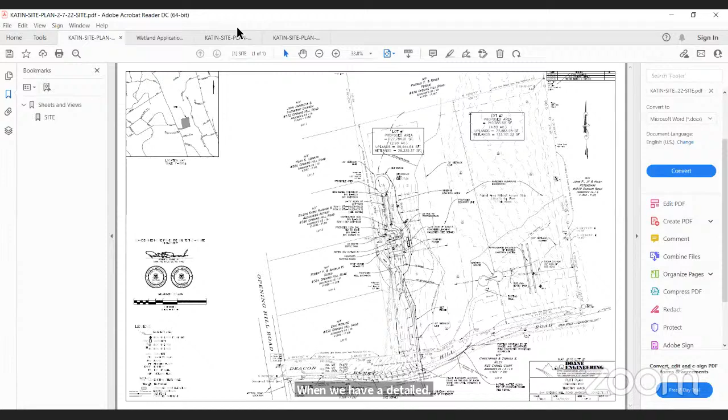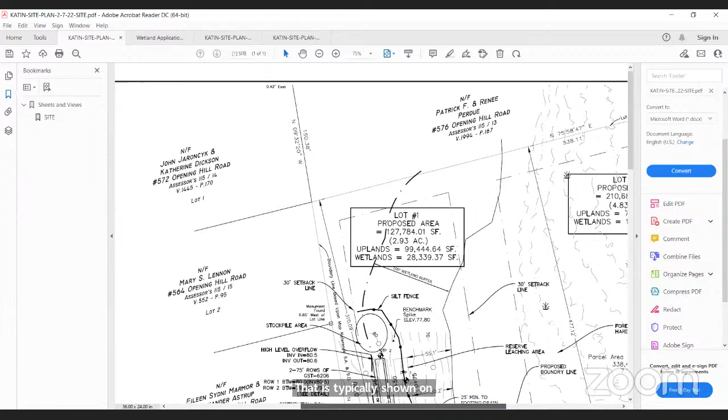We show all the detail that is typically shown on a site plan. Once the lot is sold, or Timothy decides to build a house, we'll have a detailed house design, but the house location, sanitary system location, and driveway location will remain the same.

We have enough room on this site for stormwater recharge at the toe of the slope. One of the significant features of the site are the nice large tulips. When we moved the driveway down to the base of the hill, we were able to maneuver it around the tulips and get it up to the top of the hill where the house is.

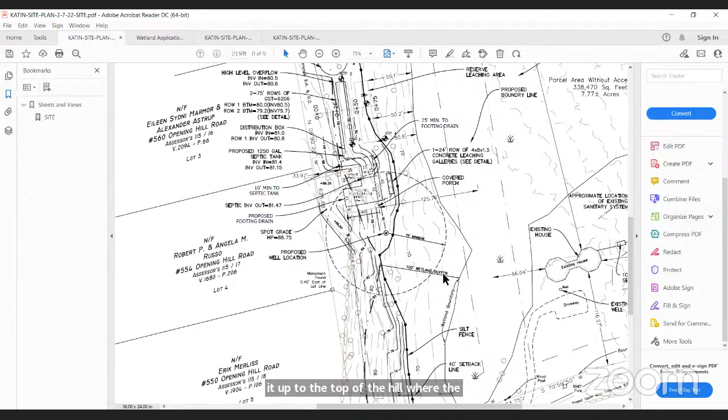Because of the subdivision, we had to do soil testing for the existing house and prepare a B100A system to demonstrate that the lot can accommodate a code compliant sanitary system.

Part of the activity would be fixing the existing driveway with maintenance. It runs immediately adjacent to a wetland swale, so we would propose to install a wattle along the edge of the driveway because it is so close to the swale.

But again, this is a referral to the Planning Commission for the re-subdivision that we are proposing. With that, I'll stop and I can answer any questions that anybody may have.

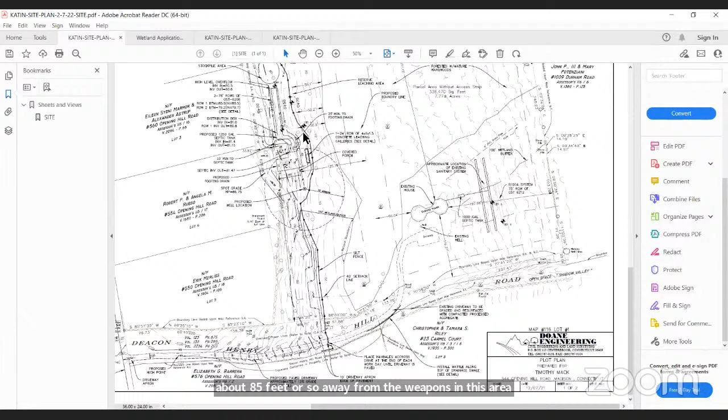The regulated activity is the construction of the driveway and the associated grading. We'll have underground utilities in the driveway. The house, the grading, and the sanitary system are about 85 feet or so away from the wetlands in this area. The silt fence, shown as the dark line with small squares, essentially indicates our limit of activity.

So part of what you were saying is that you wanted to deal with the referral tonight, but that includes this regulated activity permit for the driveway and the septic. Well, but not the house. I mean, it's hard, no, but we've got this all here.

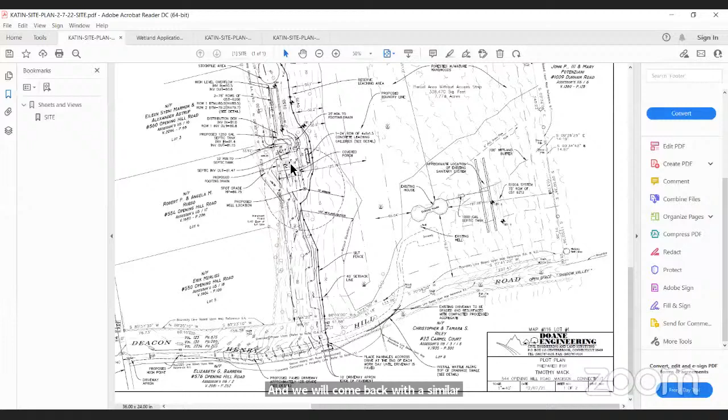No, this is a referral to the Planning Commission, and we will come back with a similar plan once we have additional detail for the house. You're correct that the sanitary system and driveway are essentially fixed as shown, and the house will change when we have a detailed house design.

So I guess it is a combination of both, a referral and a review/permit of the regulated activity for the driveway and the sanitary system.

We do have just the tail end of the proposed driveway in the 100-foot area, and we have maintenance for the existing driveway. That was all spelled out in the application.

All right. Any comments or questions from the agency members?

I'll just ask John if he's okay with taking in a combination re-subdivision application at the same time as a regulated activity request, because in my 6 or 7 years with the commission, I've never seen an application where a proposal for a new lot was combined with activity.

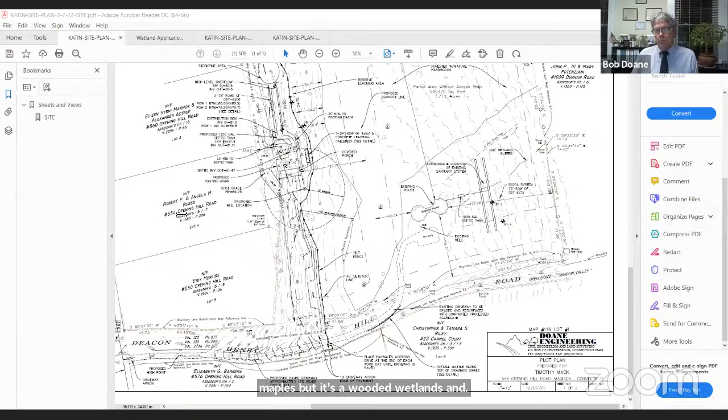Other questions for the applicant and his engineer? Very quiet out there, guys. It is quiet.

I guess I could make a motion. So with regard to application 21-41, I will move to approve the re-subdivision of 2 new lots, one being vacant, and to allow the creation of the lots, and also, should they be approved by planning and zoning, the subsequent installation of a driveway with the grading and the proposed installation of a septic system in the locations as shown.

I'll second it. All right. Can I make a suggestion that you include that the site plan does come back before this commission? Yeah, so that would be in our comment section, and yes. Oh, it would be. Okay. All right. Thank you. That's what I was going to say.

I would just like to make sure that, given the driveway and septic sanitary system in place, that any house or other regulated activity come back to us. Okay, thank you. So that's my comment. Anybody else have a comment?

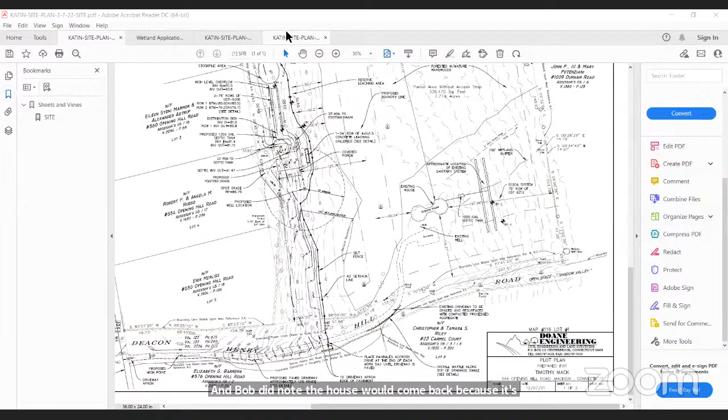No, I agree. And Bob did note the house would come back because it's not set in stone. That's correct, so I would not include it. Right. But I think it's good to call that out and make sure it's clear, and it'll be helpful for planning and zoning as well.

All right, if there are no other comments, all in favor of the motion as discussed and amended? Raise your hand, say aye. Aye. Aye. Any opposed? Okay, all right.

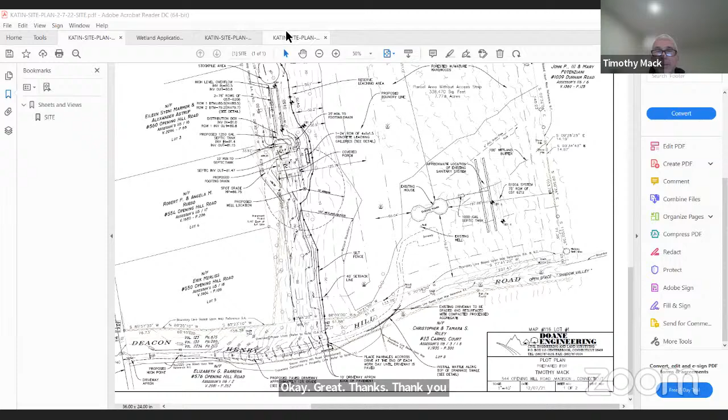Thank you very much. Have a good evening, all. Thank you for your time. Appreciate it. And can you, yeah, thank you. Yes, I can. Thank you.

All right, so our next application is 22-01 Warpas Road, which, as you'll recall, I need to recuse myself from. So Mr. Boudreau is going to take over. Do we have enough to vote on it if there's just 3 left? You only have 5 members total. Oh yeah, right, but so quorum, yeah. So I'll hide myself. You guys can go. Okay, unexpected surprise.

Okay, but I do remember this now from last time. So next on the agenda, application 22-01, Warpas Road, map 71, lot 1, owned by the Land Conservation Trust of Madison. They're looking to construct a stone aggregate surfaced access driveway and trailhead parking lot.

Are the applicants here? Yes, Mr. Acting Chairman, we are. Thank you. For the record, I'm Mike Ott. I'm a licensed professional engineer and land surveyor with Summer Hill Civil Engineers in Madison. I'm here on behalf of the Land Trust.

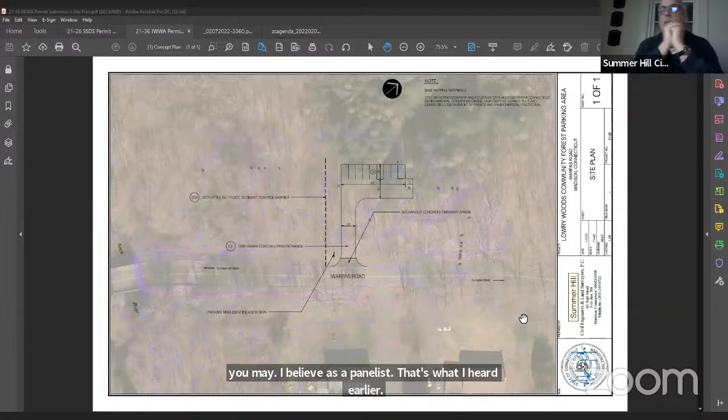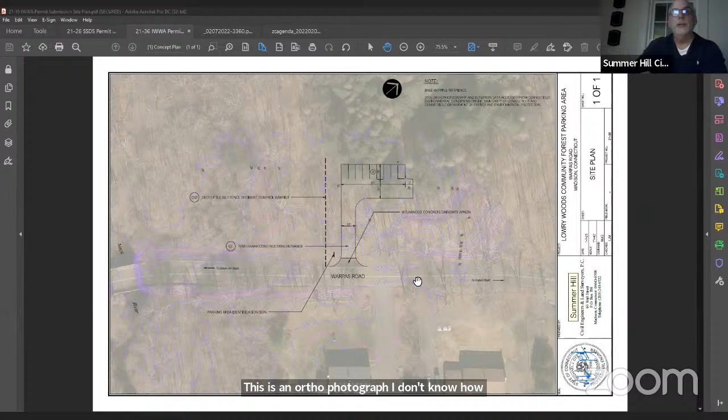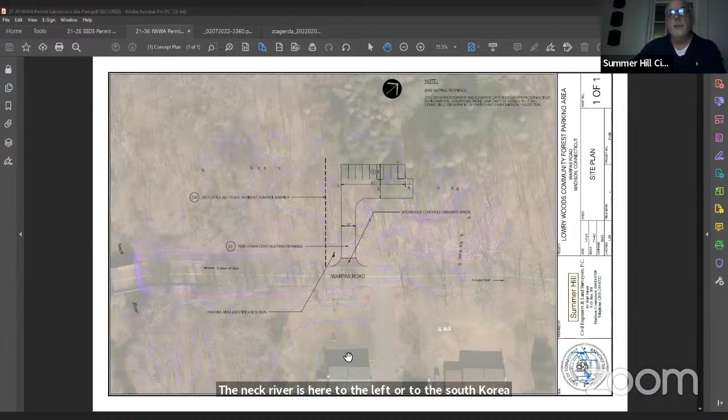Can you all see my screen now? Okay, so this is, as you know, for the proposed parking area at the Lowry Woods parcel. This is an ortho photograph. I don't know how well this is showing up on the screen, but Warpas Road is left to right across the sheet. You can see the yellow center line of Warpas Road. The Neck River is here to the left, or to the south, crossing beneath Warpas Road. This is, I think, number 58 - I probably shouldn't have tried to quote the street number, but I think that's the house number here. The driveway for the proposed parking area is directly across the street from this home.

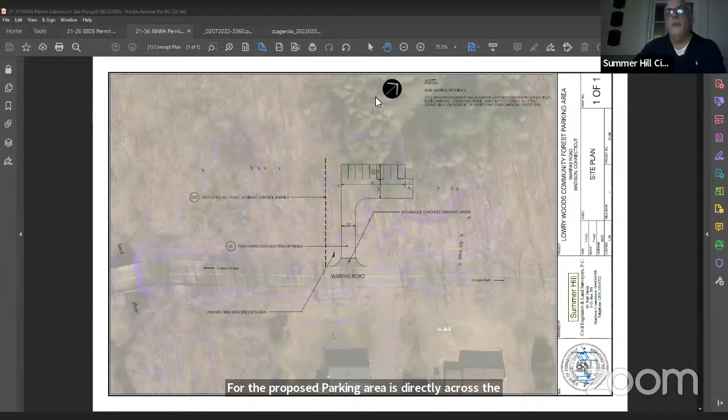I'm going to zoom in just a little bit. So the proposal is to construct an 18-foot wide driveway, and this flag to the right is the parking area with 8 spaces. The only portion of the lot, parking area, and driveway that would be paved is a bituminous apron at the very beginning, at the edge of Warpas Road.

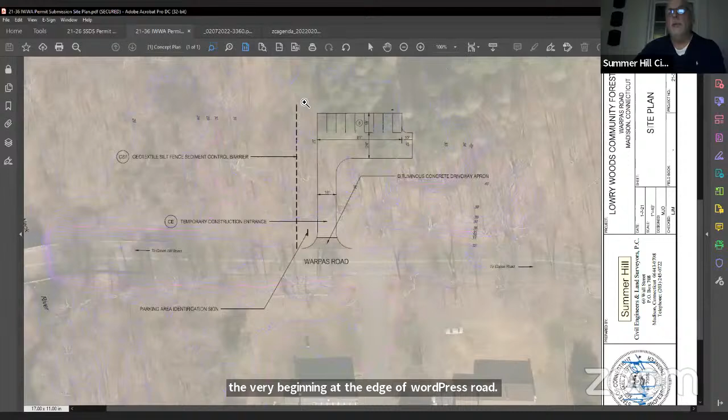Pretty straightforward, really. There's a geotextile silt fence sediment control barrier between the proposed construction and the wetlands associated with the neck, which are on the left side here, to the south I guess it would be.

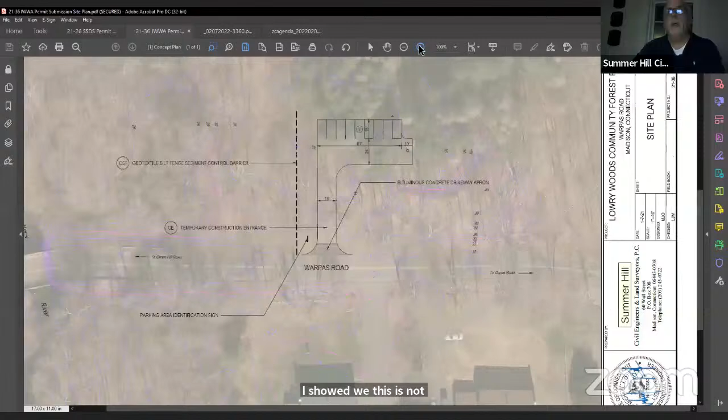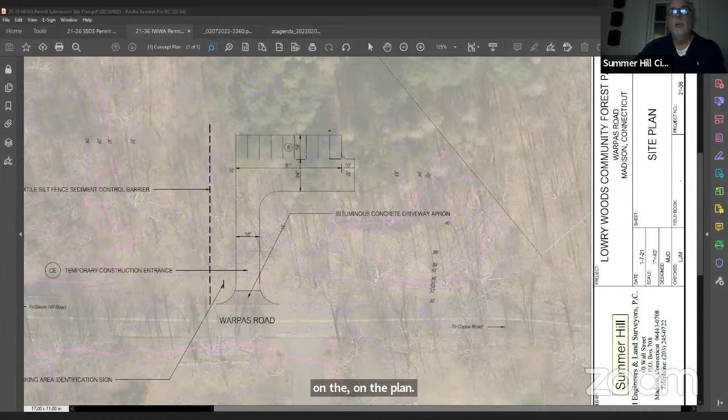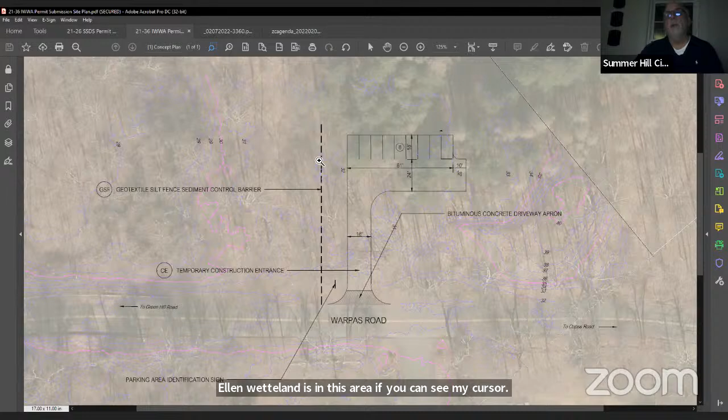I showed - this is not, as you can see, a formal survey or plan, but this orthophoto is to scale. I did create a surface model and put the state's LiDAR-based topography on the plan so you could see two things: you can get an estimation of where the wetlands are. You can see there's an elevation 28 ground surface contour on the Neck River side and another elevation 28. Then the ground slopes up to the site, which is up at elevation 32 or so. So the inland wetland is in this area, if you can see my cursor moving - it's the inland wetland, and the area between the wetland and the parking area is wooded.

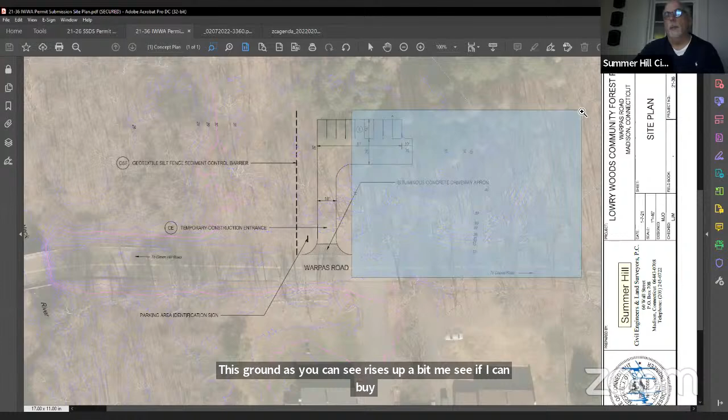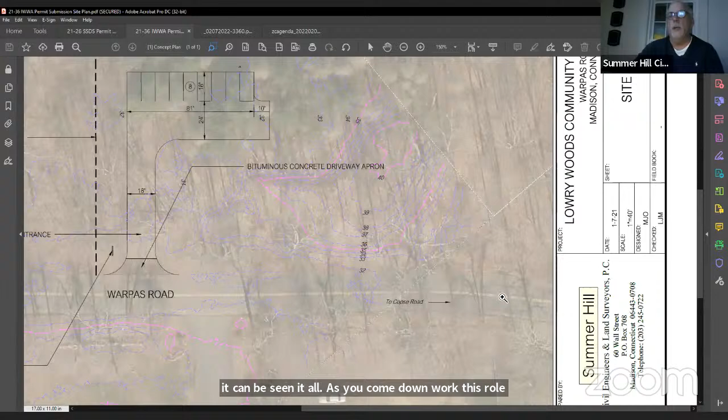This area here is a mound that rises up, so when you come down Warpas Road from the north, heading south this way to the left on the sheet, you actually won't be able to see this parking area. This ground rises up a bit. Let me zoom in a little more. I don't know if you can see these numbers, but it's up as high as elevation 40 here, and the parking lot's down at 32. So it would be difficult - I don't think it can be seen at all as you come down Warpas Road going right to left across the sheet. In the opposite direction, heading toward Copse Road and going right across the sheet, you would be able to see the parking area.

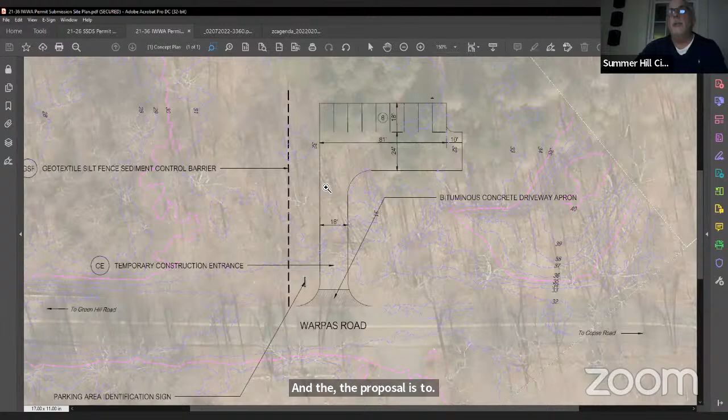I think you all know that some clearing took place in this area, and the proposal is to have some native plantings installed here to replant the area between the new construction and the area where clearing took place, so that area will get reestablished with vegetation after the parking lot is completed. I said earlier the only portion of the parking lot and driveway that would be paved is the apron. The plan is to surface the driveway and the lot with crushed stone aggregate.

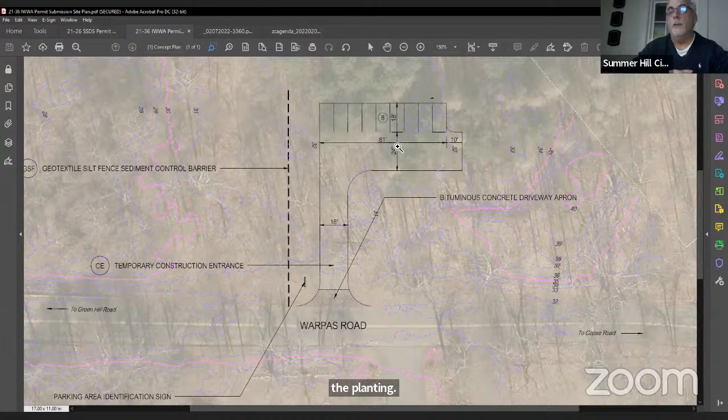I understand there's some detail about the planting that maybe Bob Kukta or Dave Roach might be able to speak to if they're up as panelists. I can leave my screen shared if they would like, so they can use the plan. And I'd be glad to answer any questions before we do that, if you have any.

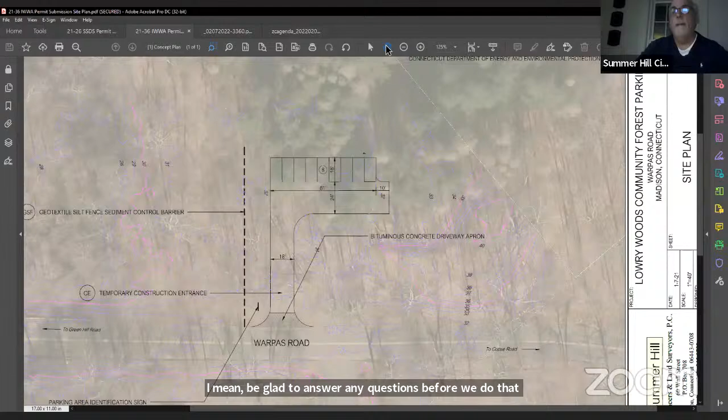So any questions from the commission? This is a quick question from a documentation standpoint - would it be possible, should we have the wetlands delineated on this, so for the record we know where they are versus where the construction is?

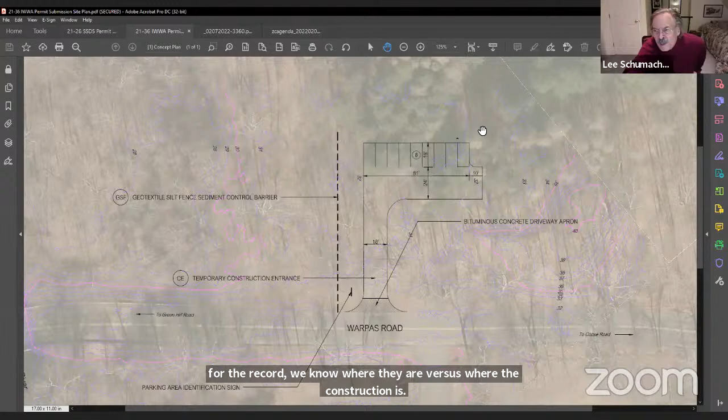That's a question for Joe and John, I guess, whether or not we need that. It makes sense to need to know where the wetlands are.

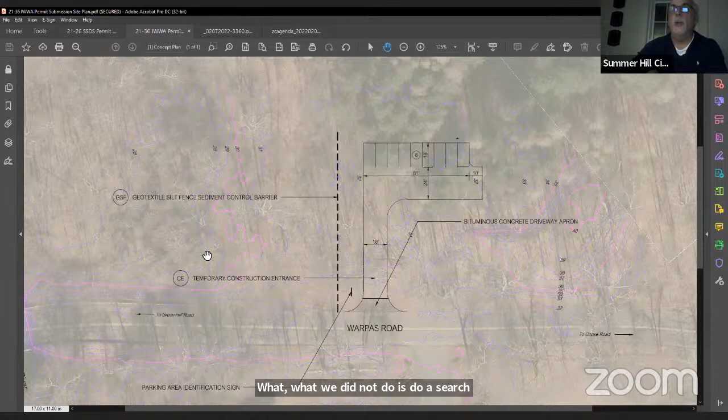So if I could, the wetland boundary was delineated by Rich Snarsky. What we did not do is do a survey and locate them and place them on the map. But it's pretty obvious when you're in the field that they're down at this 28 elevation contour, and I measured the edge of this parking area would be about 75 feet from the wetland boundary, from the flags in the field.

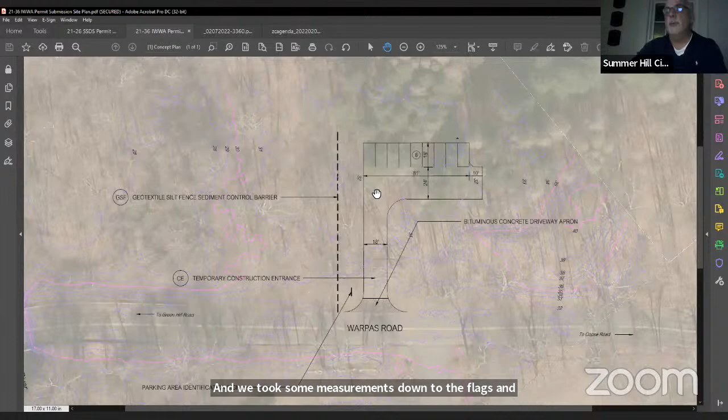I neglected to say that Dave Roach and I actually rough staked this parking area, and we took some measurements down to the flags, and again the distance between the construction and the wetland boundary is about 75 feet. It's pretty obvious when you go out and walk it.

Is the agency just receiving this evening? It was received at the last meeting, Mike. It was, okay, yeah, yeah.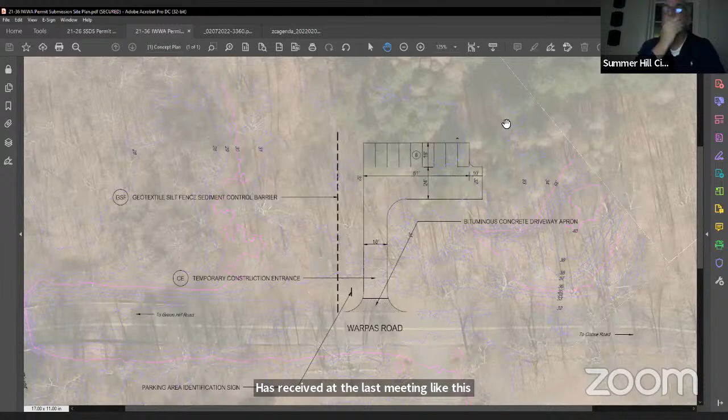There is about 65 to 75 feet of undisturbed wetland forest between where you see the sediment control barrier and the wetland itself. So it's the last 25 feet or so.

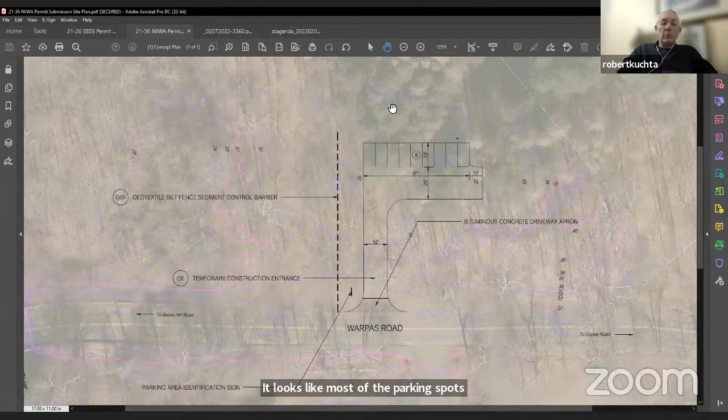About half of the 18-foot wide driveway is within the 100-foot review, and the rest of it is out of the review. From my walking it, most of the parking spots are out of the 100-foot review - it's mostly just half of the driveway coming in off of Warpas Road that's within the 100-foot review. Yeah, I think that's correct. That makes sense with what Dave and I measured also in the field.

Now, you mentioned there was clearing. How come some clearing took place?

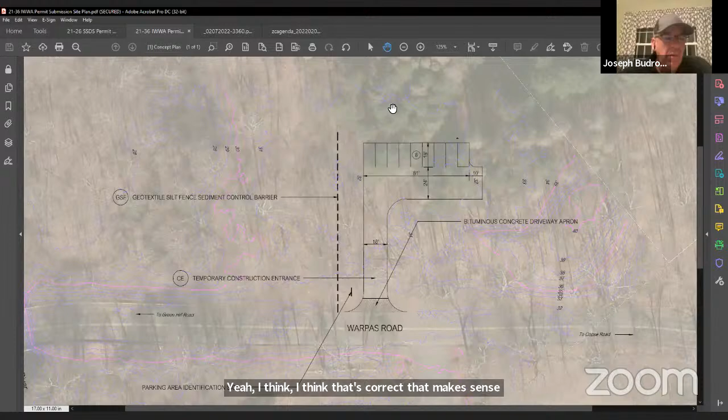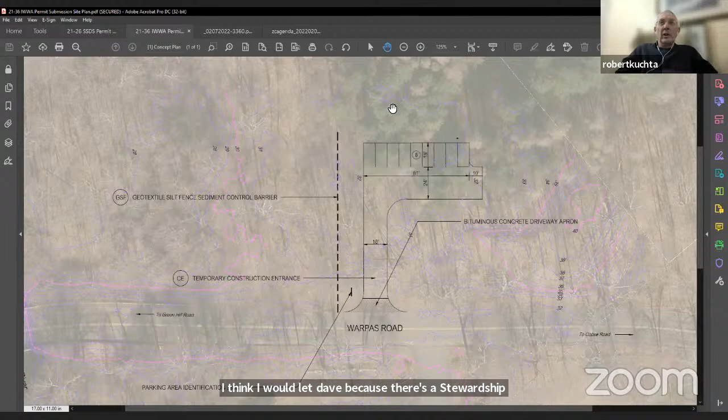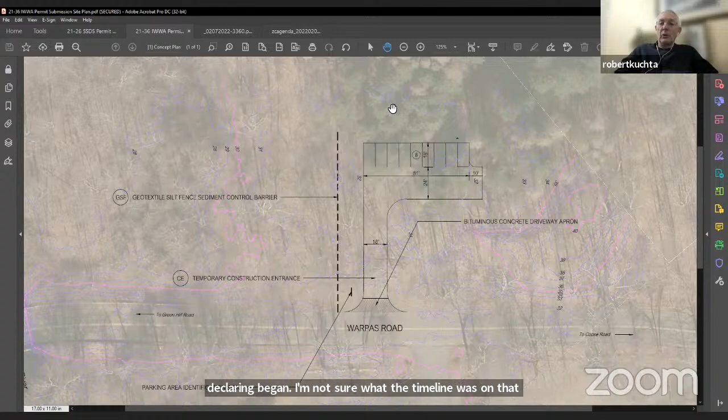Well, I have to let maybe Dave or Ben from the Land Trust or maybe Bob speak about it. I think I would let Dave, because there's a stewardship committee, and I think they started the opening up of the area so they could see where the parking lot could actually go. It may have been that the wetlands weren't flagged yet when the clearing began. I'm not sure what the timeline was on that. Maybe John DeLaura could add some of that information.

If I'm asked. Do you have any information on that, John?

Yeah, I mean the way this got started, they got a verbal notification of a violation. They were basically clear cutting a large expanse, and Rich's flags were up, because I went out there and you could see that they clear cut, almost - to me it looked a lot closer than 75 feet to the flags. Some of that may be where the parking lot's going to be, but that's not where the clearing was. The clearing was much closer to the wetlands than I think we're getting testimony to now, because yeah, I can agree that the parking lot may not be within 100, but the clearing was.

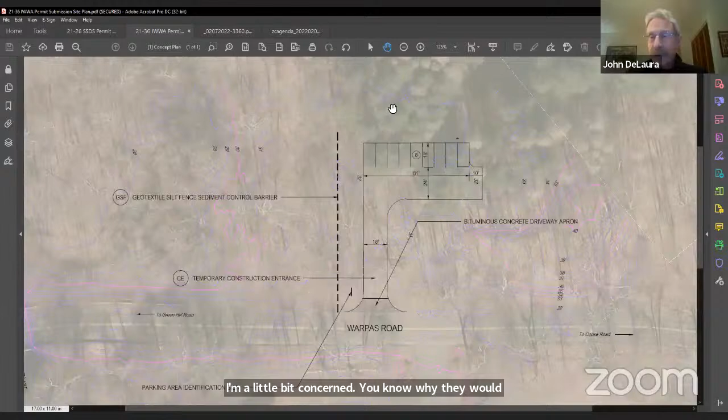And I'm a little bit concerned why there wouldn't be a remediation plan. I'm looking at a sketch, basically a presentation of a theory of a parking lot, and that's great, superimposed over something that I can't really see.

But I can tell you that the reason why it was cleared - a lot of it's cleared. In other words, from Warpas Road pavement there might be 10 or 12 feet of brambles and brush, maybe a winterberry, and then it's cleared all the way back. So what you're looking at from the parking lot, which is 24 feet wide, that driveway - if you just use that, it's almost 75 feet back, which is all cleared.

So my question would be, what's the remediation plan? How are you going to buffer that area from the neighborhood? That's my concern, that it was a violation, and there's no evidence for remediation of that violation.

Before Dave Roach or others from the Land Trust speak, John, I just want to restate what I said, and maybe I wasn't clear enough, but I'm quite sure I did indicate that this area was cleared, and the limits of clearing are definitely to the left of this parking area. That's why I said the area that won't be new construction will have to be planted and reestablished. That's what I meant.

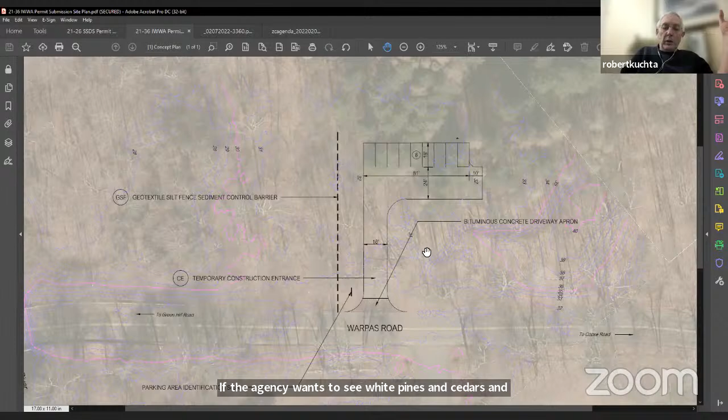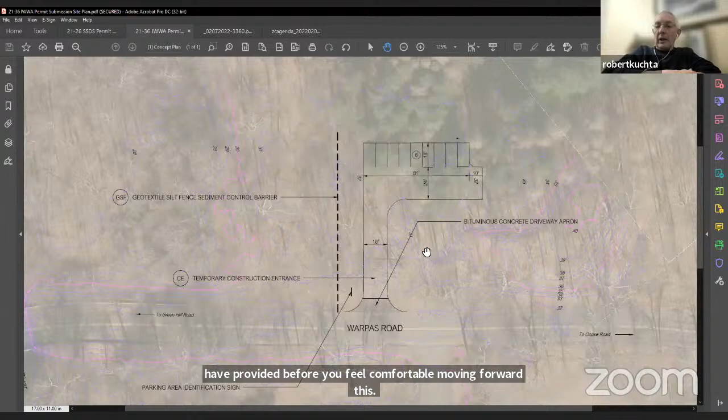Well, from my horticultural background, I've been out there at least 2 or 3 times during the clearing and after. If the agency wants to see white pines and cedars and native high bush blueberry and winterberry, that's certainly feasible, and we could have that put on the plan, as well as a line that delineates the existing clearing. If that's information you'd like to have before feeling comfortable moving forward, I'm sure Mike and I could work on getting that to you. Well, that should be included with the application.

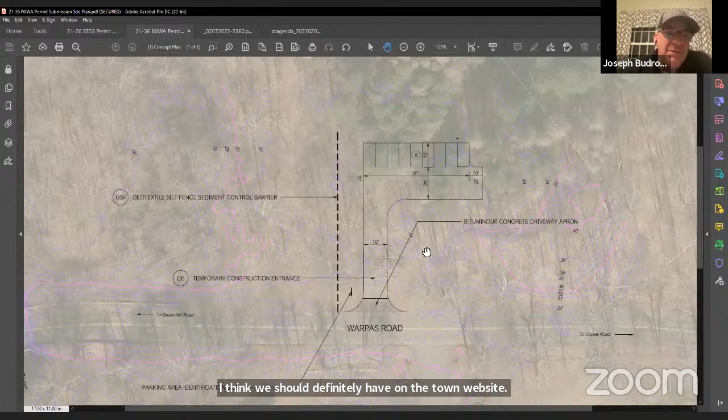And in a case like now, added before a decision. So there's a potential remediation plan to the south of the driveway. We don't have the wetlands redlined, at least on this plan. So I would think, if we're not going to want a survey of this 150 by 300 foot area, we should definitely have on the town website the remediation plan and all the plantings to reestablish vegetation to the south. And we should have the wetland line at least redlined on this ortho map. I agree. I agree too, Joe.

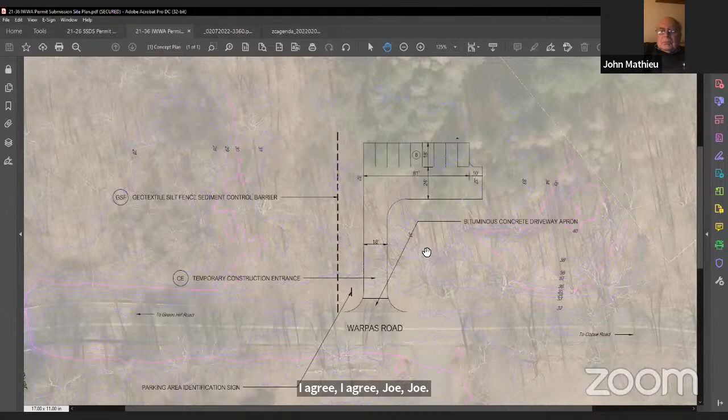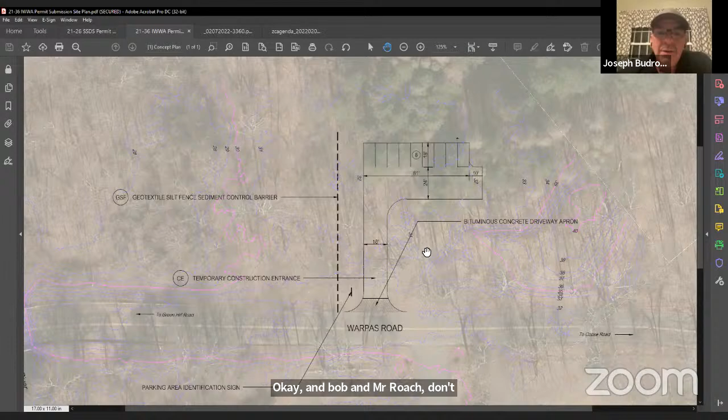So, are there any questions amongst the board with regards to what Mr. Ott has explained? No, I guess we just wait till next meeting and see a more detailed plan. Okay, and Bob and Mr. Roach don't have anything more for tonight? Then Mike Ott and I will put together the replanting plan.

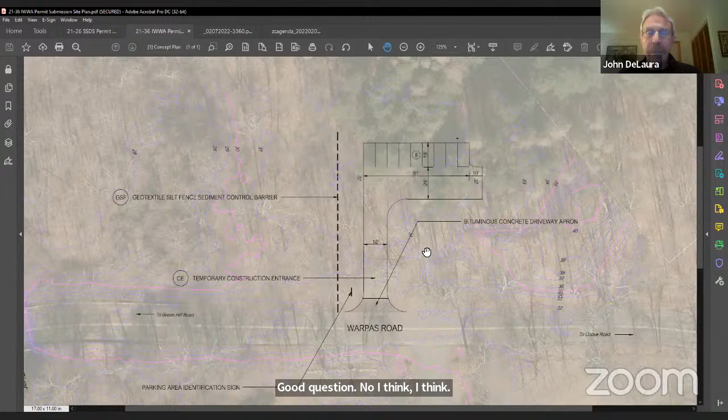Okay, so at this time I'll just need a motion for this application to be continued to our March meeting. Joe, before we do that, John DeLaura, do you have anything else to add besides what Joe just stated? Good question. No, I think the main concern is the remediation plan. We would always accept a planting plan, and fortunately Bob Cook is going to put this together, so he's going to put together species that I'm sure will be acceptable to the agency. But our format in a situation like this, especially in a violation, is to take a look at that, and I think that's the right way to go.

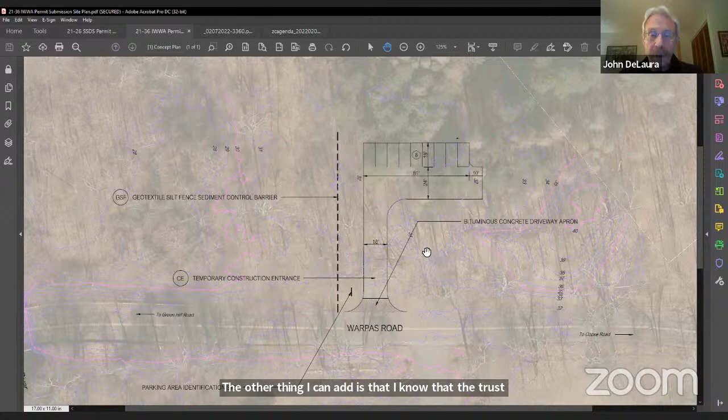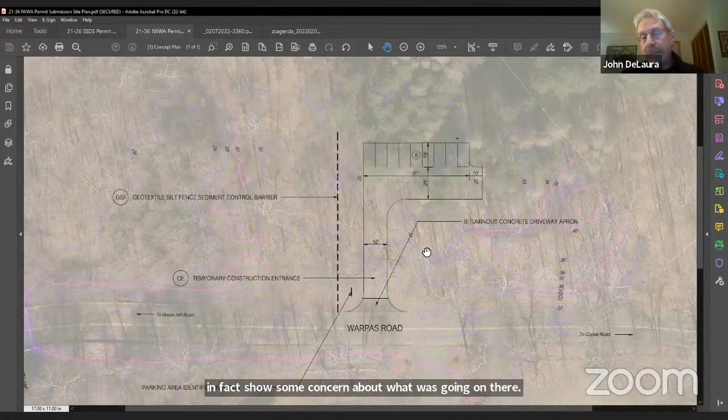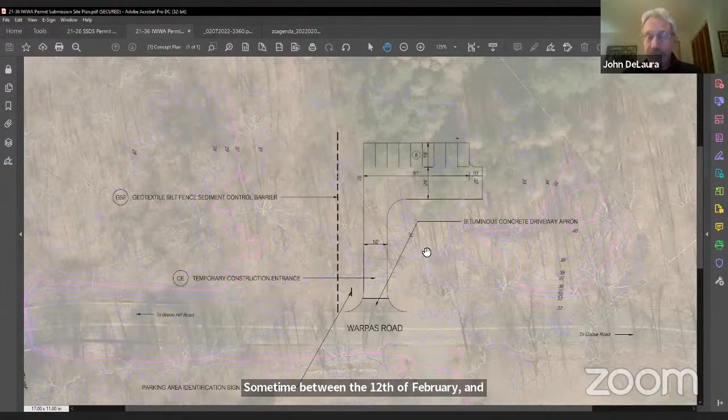The other thing I can add is that I know the trust is going to put on, and Bob, you can correct me, or David, I think on February 12th, much to their credit, they've reached out to the neighbors who did show some concern about what was going on there and how that was going to impact their residential character. So to their credit, they've got a meeting on the 12th with the neighbors on the site to explain what's happening. And I think that gives the agency and me some time between the 12th of February and the next meeting to get input from the neighbors who were concerned. So I think it's a good idea to continue this. It's within the statutory time limit to go to March. So I think that's the right way to go.

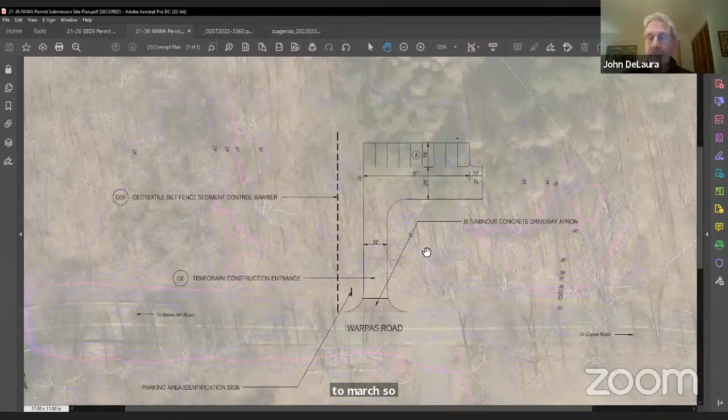I'll also add, if Mike could add the boundary of where the clearing limit took place. We can sketch that, Joe. Yes, we could take some measurements in the field.

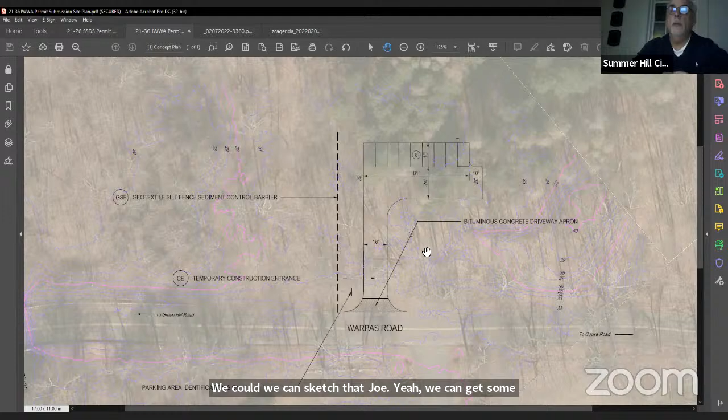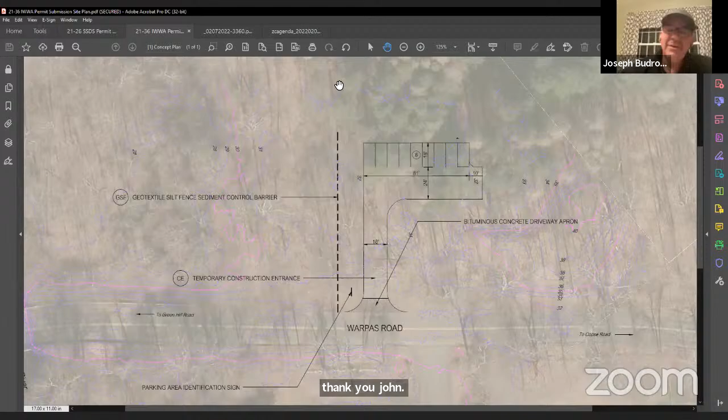So do we have a motion to continue the application? I move that we continue application 22-01 Warpas Road until the next meeting, the March meeting. I'll second it. Thank you, John. All in favor, say aye. Aye, aye, aye. Okay, the ayes have it, 3-0.

We're going to see Warpas Road at the March 7th meeting. 7th, yeah. I like March, it's always exactly the same as February. Right. All right, so that ends our applications for being heard and voted on tonight.

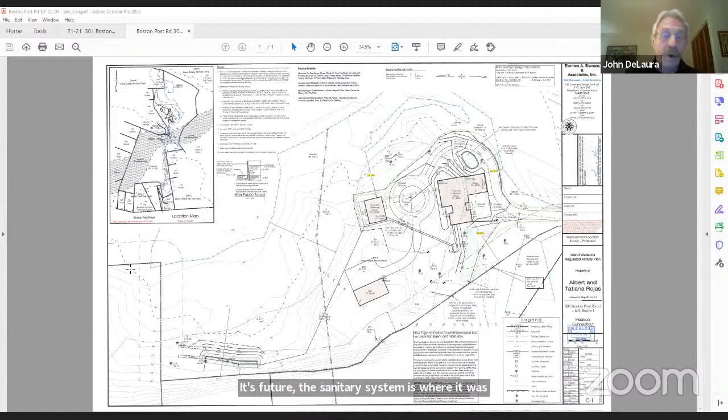Okay, so it's up now. You can see the house is the same, it's future. The sanitary system is where it was, outside the 100. The small barn is gone, and it has turned into a two-bedroom single-family dwelling - a small rectangle in the back sharing a sanitary system - and then a larger barn that I think is actually going to be in the future. So the barn will be future, the house will be future. What they're asking for now is that small single-family dwelling.

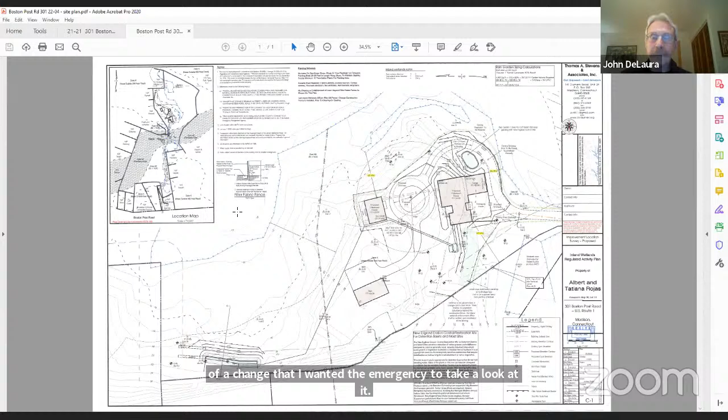Well, I think it's probably good to take a look at it with these changes and future changes to keep in mind.

Is the septic going to be the same for everything that's going to be added? Yeah, it's definitely got the second dwelling connected to it.

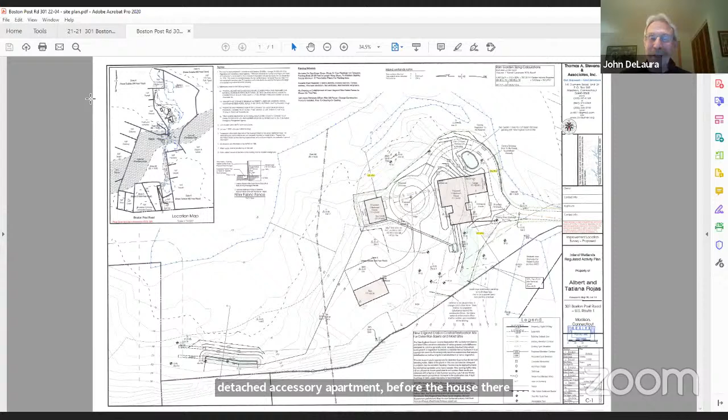So John, they basically want to build a detached accessory apartment before the house. They want to live in it while they're building the house, so there are some steps that have to happen between that. It's possible to do that - it's been done before. We don't have a restriction - if it's 400 square feet it can be a single family dwelling. They chose to put a giant sanitary system in, that's fine.

So they're just anticipating what they're going to do, which eventually would be to build that 4-bedroom in the barn. We would have them file on the records - this is not something you really need to know, but I'll tell you anyway - that they'll have to abandon that small single family 2-bedroom and revert that to an accessory dwelling before they'll get a CO for the 4-bedroom new house. So they can do it, and they're just anticipating all of it at one time with the sanitary system.

And does this plan show a clearing limit? It shows an E&S barrier, but I didn't see actually a clearing limit.

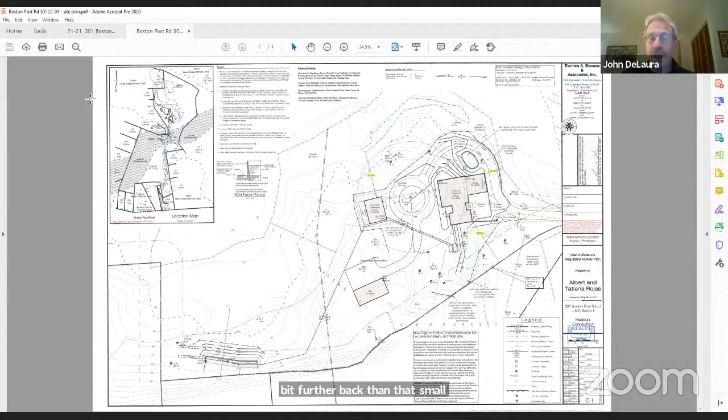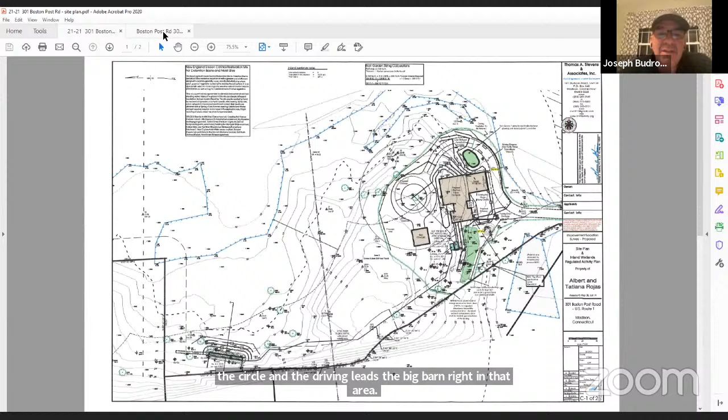If the single family dwelling is pushed a little bit, it's further back than that small barn was that you saw on the first site plan. In the first site plan, you didn't see the big barn, you didn't see the 2-family, but you did see the small barn, almost like where the circle in the driveway leads to the big barn, right in that area.

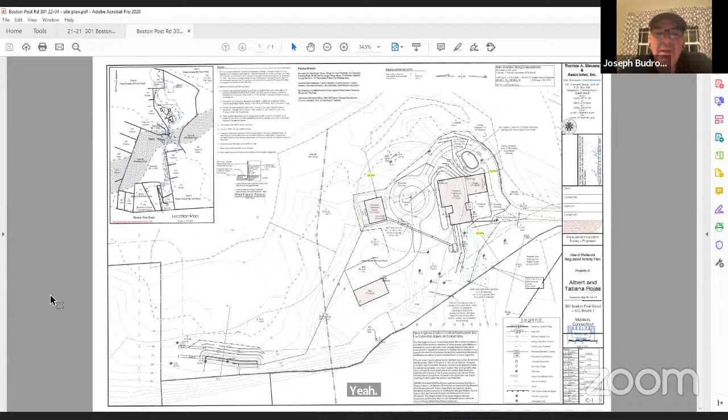Should this be a second site walk on the same day as Pleasantview? Is it the same area? It's Route 1, right? It's Boston Post Road. Yeah, it's Boston Post Road.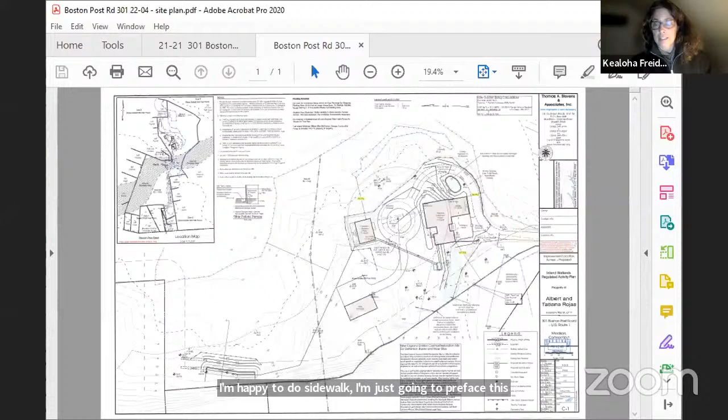I'm happy to do a site walk. I'll just preface this by saying the next 3 applications, I'm also going to suggest a site walk. Yeah, so am I. Might not be on the same day. So we'll all go walking. I'm bringing my dog. No, I won't.

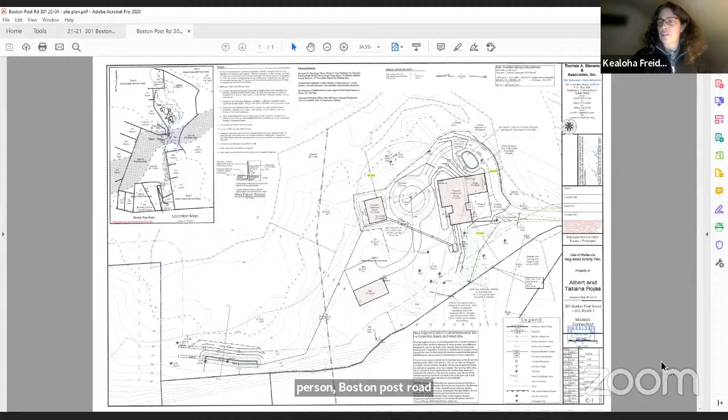All right, so let's go to 301 Boston Post Road. Do you guys want to add that in as a site walk? You know, I think we should, I guess. Yes, if everyone's okay. Yes, okay, yep, okay, so let's do that. And then for the site walk.

And then we come to our new subdivision, 2206, 2207, 2208 Wildwood Avenue. And these, as promised, have come back as potentially developed lots. I think given all the discussion we had about this subdivision, it sounds like you guys are all on the same page. It would be time to go and do a site walk there.

Yeah, I don't know whether we formally have to change it, but on the agenda, 2208 is misidentified as lot 8, it should be lot 3. Oh yep, it's lot 3 on mine. Yeah, on mine it's lot 8. Yeah, it's lot 3 on mine too. All right, Lee's correct, as long as it's corrected in the record. Yeah, Lee's right, we should correct that on the record. Okay, all right, so site walk for those.

And then our last receipt for the evening is 22-09, 463 Summerhill Road. This is Camp Laurelwood, and they want to put in a water flow system. So a regulated activity permit to install a 22 by 25 foot building on a concrete slab, approximately 60 feet from the wetland.